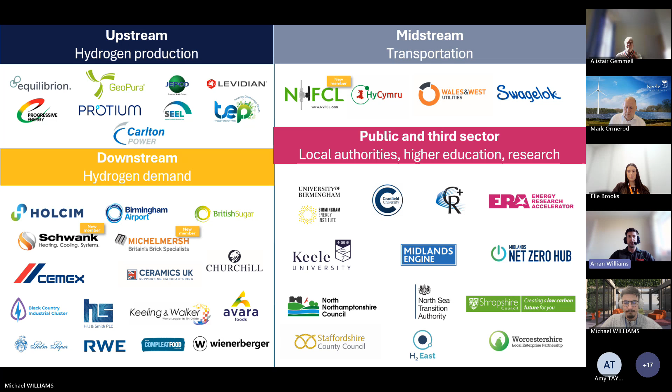Go to the next slide. Just a really high-level recap on hydrogen development since the last meeting. Quite a short one compared to previous consortium updates. I normally would have several slides on what's been happening, but for those of you keeping track, it has been quite slow.

We're waiting on the hydrogen strategy refresh to come through, and with that, we're expecting the next round of real tangible updates. We'd hope to see an update on the final projects for HAR2, and further details about the HAR3 round allocation process.

Sorry, my mic is disconnected. Can you hear me? Yeah, we can hear you, brilliant.

Sorry about that. Also, on the hydrogen transport business model, we're expecting that first allocation round to open in spring, but we still need real clarity on exact timelines and the details surrounding it, although conversations have been ongoing with DESNZ in the background.

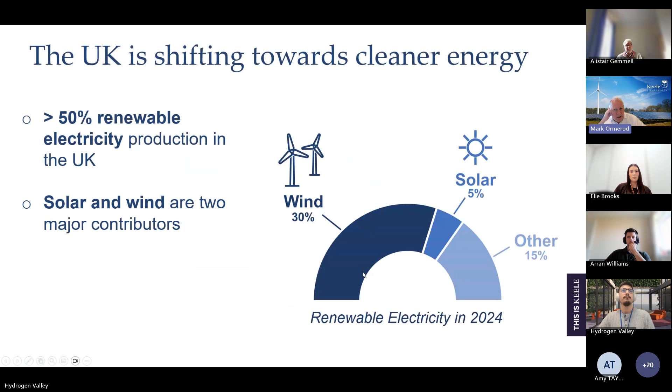No problem. I think the next few slides I can skip through quickly because everyone on this call... we recently gave a presentation to the whole university, and they were probably not as well versed in hydrogen and clean energy. So Michael, if you skip through this slide, the one after this, and the one after that, then go on to the next one.

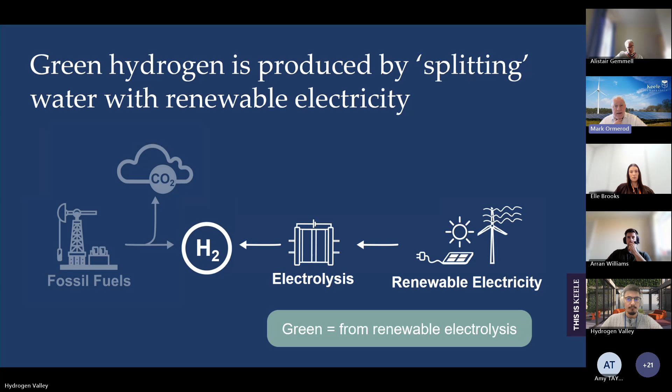Very much the ultimate aim was to be able to demonstrate around green hydrogen. Again, I think everyone here knows what green hydrogen is - producing hydrogen from renewably generated electricity. In our case, it then goes through the smart energy network demonstrator to an electrolyzer we have on campus, and then the ability to electrolyze water to produce green hydrogen. Okay, next slide, please.

So it was a project funded by Research England, with some demonstration of elements at a number of universities, but led by Keele with 5 million pounds of external funding from Research England, very much around demonstration, development, and also a significant amount - I'm not going to talk about the skills part of it, but a lot of skills sessions and development sessions and general knowledge exchange. Okay, next slide.

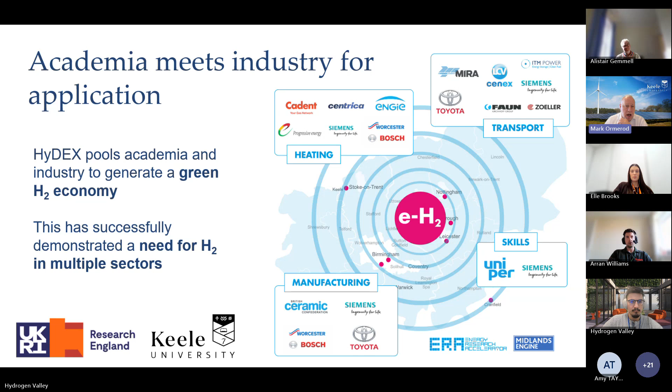So a significant number of industrial partners on the project, covering different areas - skills, manufacturing, transport, and heating. There's 7 or 8 university partners, and generally a project that's worked very well in terms of engagement. I wasn't heavily involved in that side of it, but the reports and events I went to were really excellent around engagement with regional and national industry in this area. Okay, next slide.

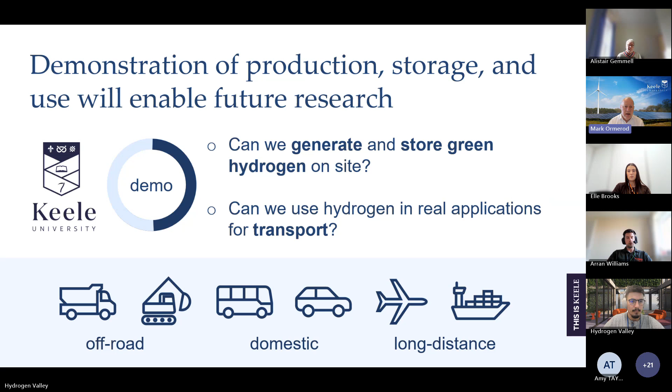And so I'm going to focus on the final few slides on the work we've done at Keele. It's quite a long journey - we've been on this journey for some time around being able to demonstrate hydrogen production, storage, and use, and not only being a demonstrator, but a research facility. The first thing was to actually generate and store green hydrogen on site, and then subsequently to use that in real applications. Everyone here will be aware of potential applications for hydrogen around transportation, whether domestic use, long distance use like shipping and flights, or off-road use such as what JCB is developing. Okay, next slide.

The reason we managed to get this project and run it from Keele is that we have our own campus renewable energy, low carbon energy generation park on campus, which has 12,500 solar panels, 2 large wind turbines, and a large industrial battery. That links to our smart energy network demonstrator, which uses our private network on the university campus, which is like a small town: 12,000 students, 2,000 staff, 350 mixed-use buildings, and a large integrated science and innovation park. Because of the way the university works and the potential to generate green hydrogen at Keele, we were able to leverage the funding to extend the smart energy network demonstrator to an electrolyzer and start producing green hydrogen.

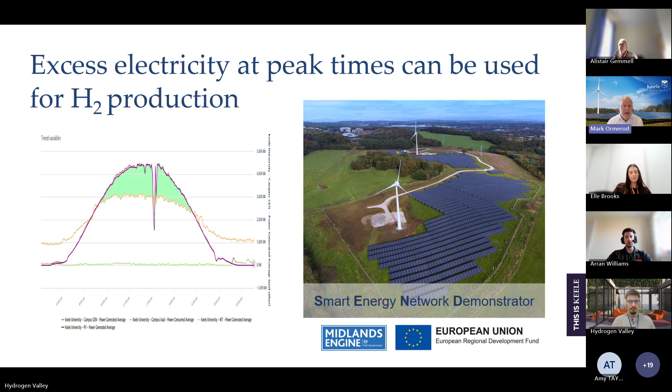On the campus we've installed an electrolyzer. It's a fuel cell systems electrolyzer, an anion exchange membrane electrolyzer.

We can produce, not huge quantities of hydrogen, but through its modular construction, we can produce 10 kilograms of hydrogen per day.

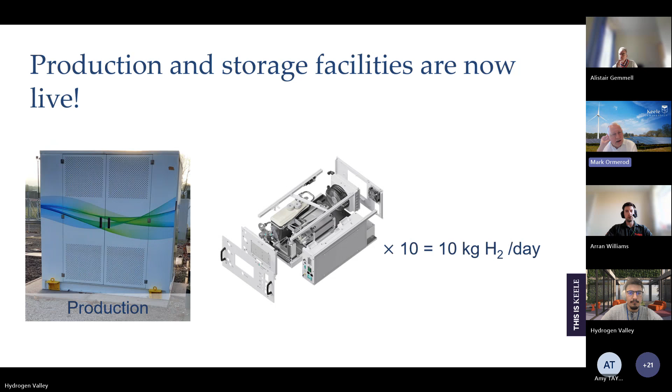We can store up to 100 kilograms of hydrogen. So we've got production through the electrolyzer, storage ability, and then the refueling ability. The site now looks rather nice, I just haven't updated the photograph.

We formally launched it in early January. We had Baroness Berger from the House of Lords, the former Shadow Minister around energy and climate change, come to open it along with quite a lot of external people. The site looks better now, but these photos were taken at an earlier stage. So we've got production, storage, and refueling.

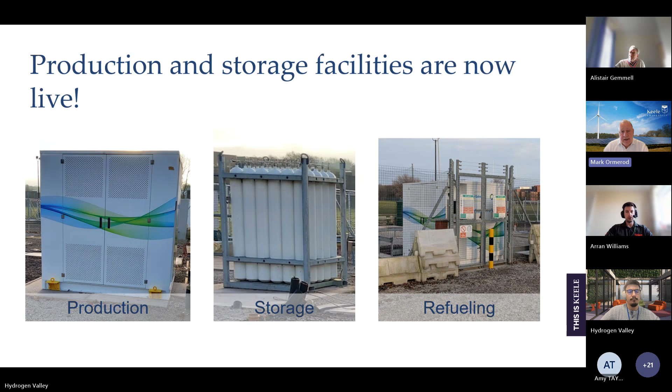One of the things we've been working on at Keele for a long time is using the campus and our private network and our commitment to sustainability and low carbon energy so that we can use the campus as a living laboratory, in this case for the production, storage and use of green hydrogen. We've got 2 hydrogen cars from Toyota that we've now branded up, so there's a full demonstration across the whole chain, from renewable energy generation through to green hydrogen generation, to fuel the cars we use for particularly local journeys, demonstrating the power of green hydrogen made at Keele powering this car.

We're really now developing this as a platform for more detailed research around smart energy and hydrogen usage. We've just submitted a paper around the potential and feasibility for using it in green transport options, including ultimately buses from Newcastle up to Keele.

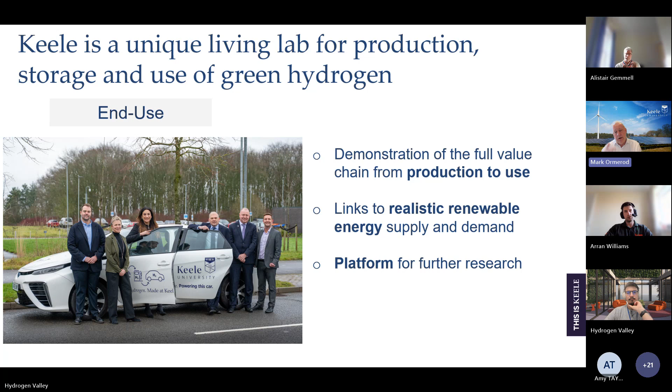The whole project, the HyDEX project, has now finished in terms of funding, although we're still actively doing research and have secured other funding streams. We did win the UK Knowledge Exchange Award for the best place-based knowledge exchange initiative for the HyDEX project, for the whole concept of producing, storing and using green hydrogen, as well as the wider skills and knowledge exchange around the project.

I think I've got one or two slides left. This is very much where we've got to, that we are trying to generate a...

Real hydrogen research centre around smart energy, hydrogen, renewable energy generation, and energy storage, as well as around advanced technology and materials. Developing a centre around this and using hydrogen to produce sustainable fuels, or ammonia for certain things. We've got smaller scale research, as well as these large demonstrator facilities taking place in research laboratories on campus. So really an exciting new centre for Keele around advanced materials engineering, that hydrogen is part of, but there's obviously a lot of other elements to that.

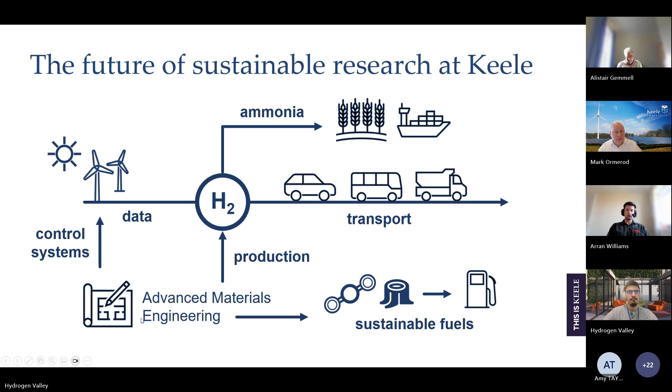Okay, next slide. Where we're looking now is very much around building doctoral training around this, summer schools, working with industry, and generating, really contributing. We've just become a member of the European Hydrogen Academy. It's very much around hydrogen technologies in industry, or hydrogen education around hydrogen technologies, which is a really good project.

We just launched engineering at Keele as an undergraduate discipline, which itself is very exciting. We've got the demonstrator at Keele, the Green Hydrogen Generation Hub, or GH2, and then starting to really say - I just mentioned one of those networks, the HyDEX Hydrogen Academy, which is an educational hydrogen technologies network.

And then final slide. So there's been a lot of people involved in this. It was a big capital project for the university. Some of the colleagues on there are colleagues in estates and engineering, building management systems, and so on, as well as colleagues in the School of Chemical and Physical Sciences like Charlie, Peter Matthews, Raphael Hershey.

Really a multi cross-institutional project across the academic staff and professional services, particularly people in estates, but indeed in procurement as well. And then ERA, the Energy Research Accelerator, which is part of Midlands Innovation, a partnership with other universities, where there's been other demonstrator projects or other key bits of the HyDEX project.

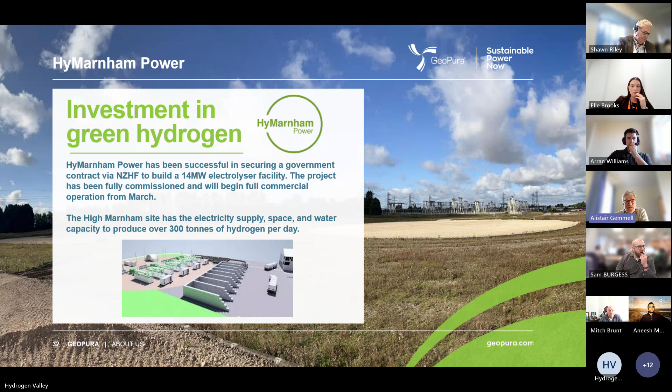Next slide. So a little bit of background and where we've got to with the project. GeoPura, first of all, and I'll explain about this a little bit more in a moment, already had a 1 megawatt production facility at a place in Doncaster. So that was producing a couple of thousand kilograms a week.

We are in a business where we are the user of hydrogen. That's our prime business, and I'll explain what that is a few slides on. But basically, other people were not building plants as fast as we had anticipated in our business model, so a lack of offtake opportunities meant that our business model was being constrained. We couldn't deliver as many of our own products as we wanted to, and therefore we decided to make our own green hydrogen to a greater extent than would otherwise have been possible. And therefore we made the decision to develop HyMarnham.

HyMarnham, with an HY, is a bit of a play on the place name, which is actually High Marnham - a place near Newark in Nottinghamshire, as we'll see in a moment. Our 50-50 joint venture partner is JG Pears, there to support us with scale-up plans.

So what does it comprise of? We bought 15 electrolyzers from a company called Green Hydrogen Systems. That delivers a 14 megawatt capacity and about 32,500 kilos a week of production. We've got HAR1 funding, which is going to be worth about 200 million over a 15-year period of the contract.

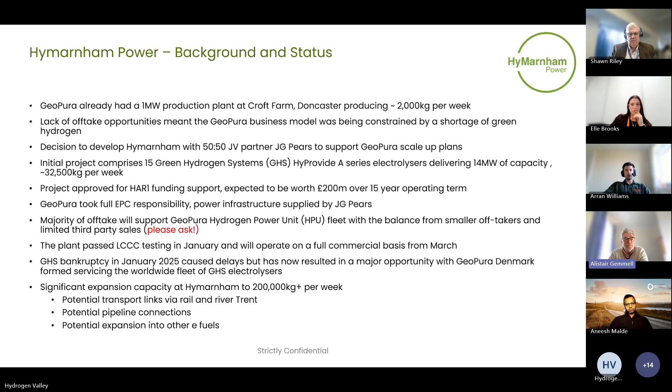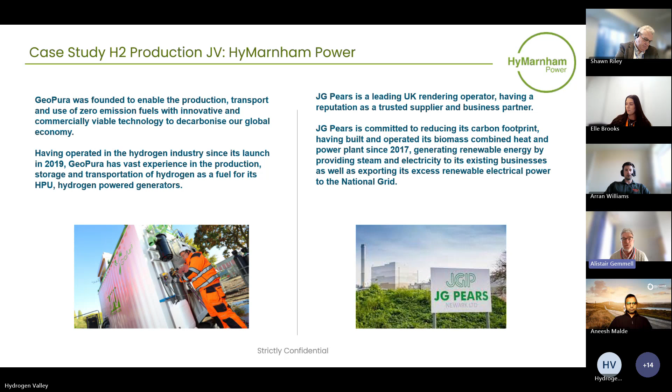In years gone by, you would go out to the market and either buy or rent a diesel generator to support your activities. We're proposing that you buy or rent a hydrogen power unit instead, getting the same power generation but with zero emissions - not only no carbon, but also no NOx, no particulates, and no noise, because it's a silent process. In order to facilitate that, we've got involved in hydrogen production ourselves. In the ideal world, we would leave this to other people and simply be an off-taker of other people's plants.

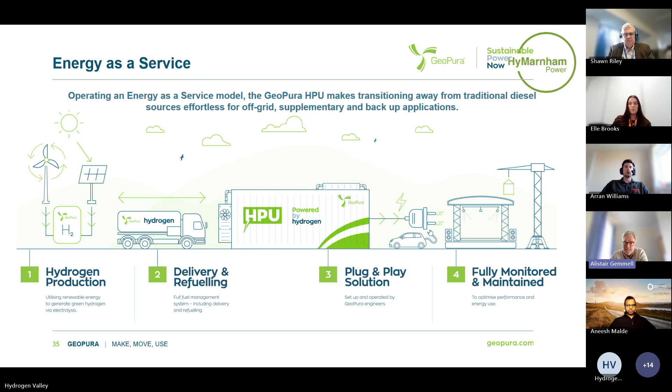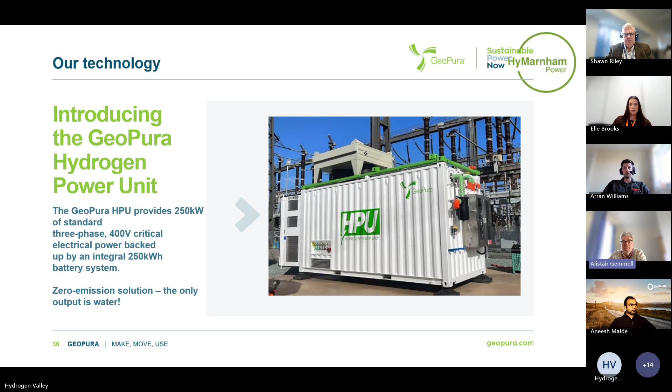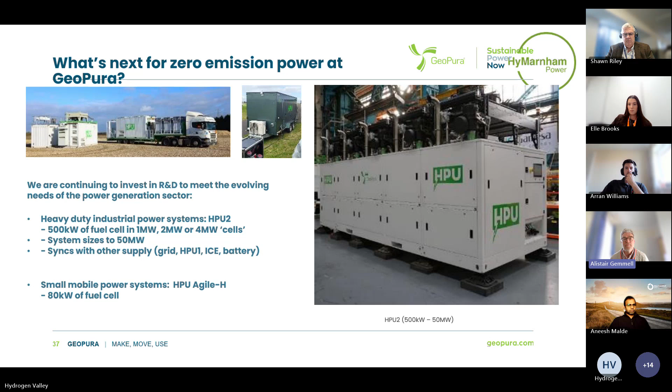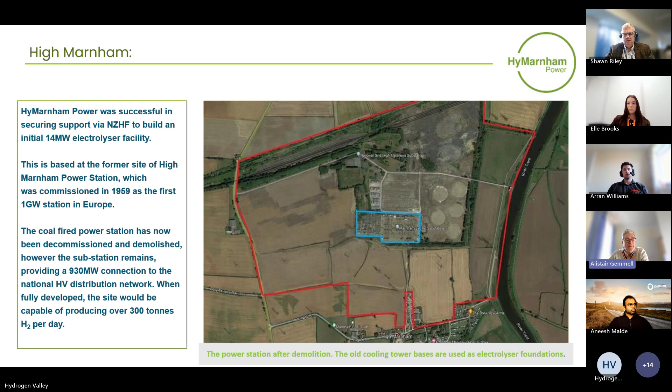To get back to HyMarnham, as I say, High Marnham is a place. It was a coal-fired power station, opened in 1959 — the first gigawatt coal-fired power station in Europe. The land owned by HyMarnham Power Limited is within the red boundary that you see there, and the only part we can't touch is the part in blue, which is the high voltage substation, which has got a gigawatt connection.

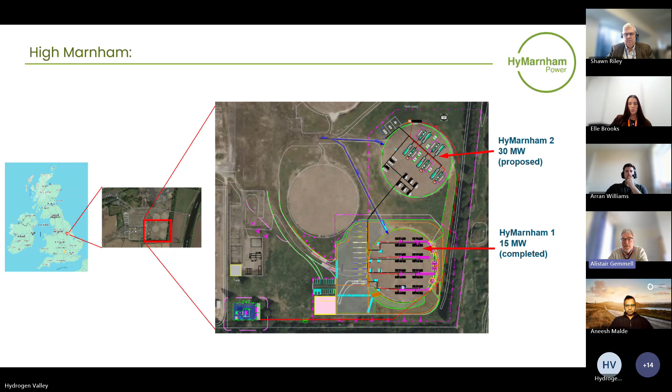This is just to show you on the map of England where it is — near Newark in Nottinghamshire. The next picture shows an aerial view of the former site of the 5 cooling towers, which are no longer there. The image on the right shows, at the bottom, what we've built: this plant I'm talking about today, 15 megawatt capacity, HyMarnham #1, built on one of the cooling towers. Above that is HyMarnham 2, which is just a proposal — we're not currently contracted to do that, but it gives an illustration of where we would scale up.

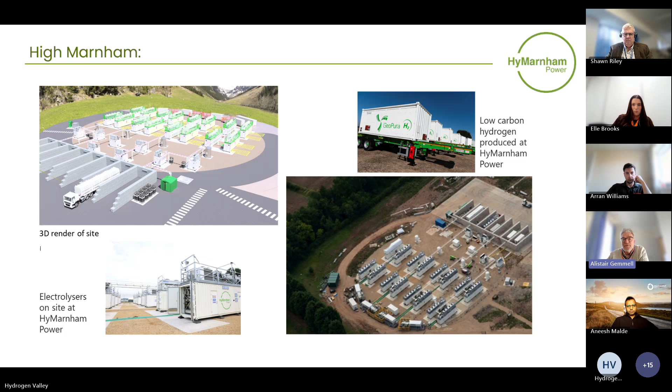That's one of the 40-foot containers there, yeah. Next slide.

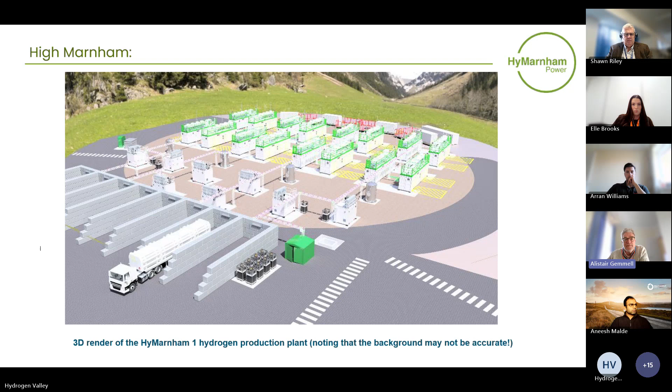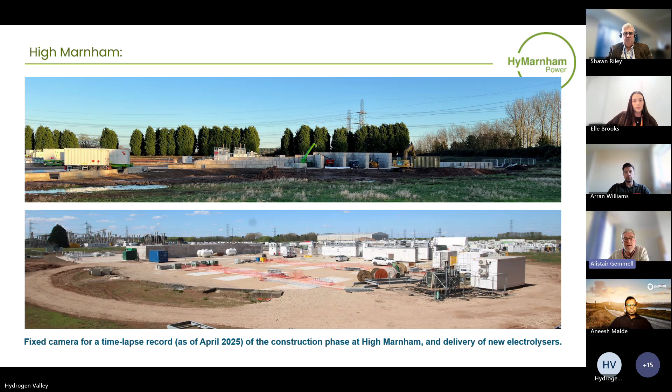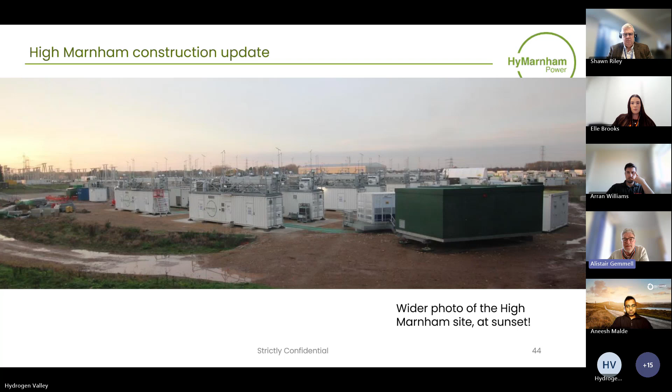Next slide. These are the refueling bays, each filled with a tube trailer, just to illustrate the 8 refilling bays and what they would look like if the tube trailers were all being filled simultaneously. Next slide.

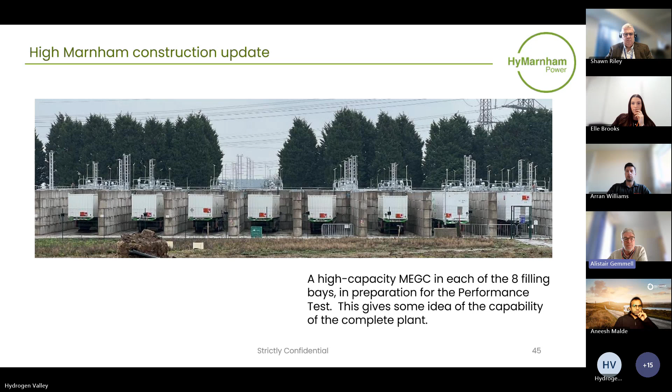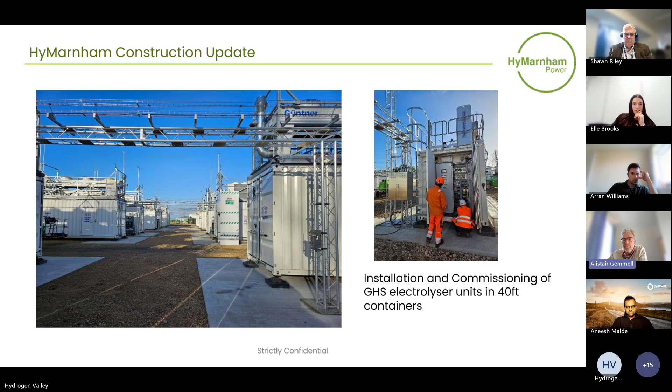This is just a shot of people commissioning the units, the electrolyzers, and it gives you an idea of the hydrogen infrastructure that's between them. So the gas is passing on that pipework that's up quite high, and anything electrical is down in the ground. Next slide.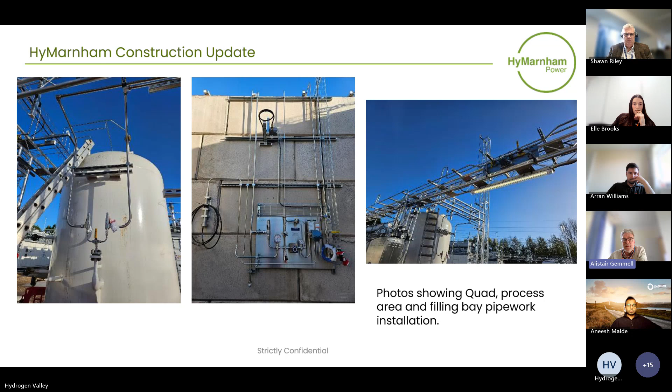And again, another couple of construction site photos. This is the safety system and the control system in the green hut. Next slide.

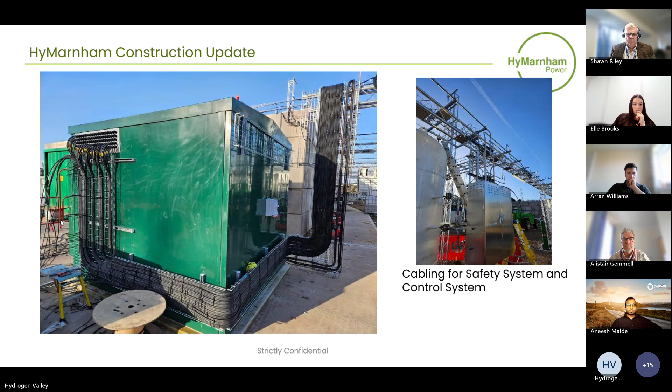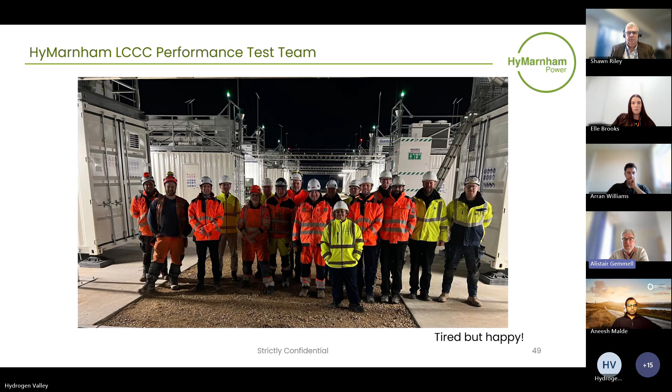And there is the team assembled in January, passing the final LCCC performance tests - tired but happy, as it says. An enormous effort by them all the way through December and January to finally get the project signed off. And the last slide, I think.

So, how have we done it? To go back through our story a little bit - GeoPura's whole business model is to do hydrogen power units, and therefore to buy other people's green hydrogen. Other people weren't making green hydrogen, so we had to make our own. That made us really pivot our business model, which is why we had to do the convertible loan note.

We did a Series A financing for 36 million. We did a convertible loan note to ask our shareholders fundamentally to back the building of the plant, which they very kindly did. It is HAR1 supported, which gives us a small grant that goes towards the building of the plant. So that was great.

And at the bottom there, in September 25 we have a buyer's credit facility supporting the site, which comes from EIFO - or the guarantee for which comes from EIFO, the Danish ECA - and the actual finance itself was provided by Barclays. So it is a fully project-financed plant, and it's the first HAR1 plant to be built. In fact, I'm not really aware of any other HAR1 plant that has even put a spade in the ground, but we have done it, and we are finished and producing hydrogen at full capacity right now.

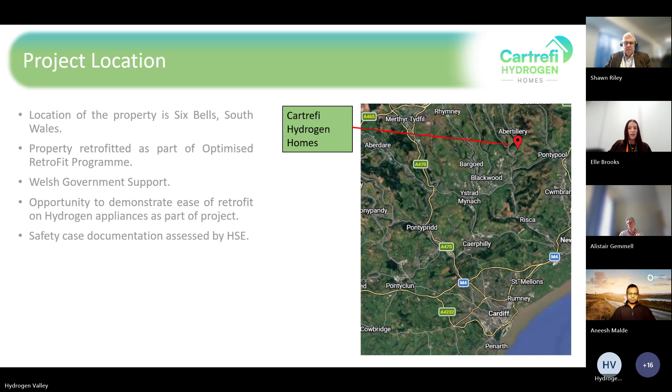So I'll now take you through the key stages of commissioning, a very shortened version of this because I didn't want to bore everybody to death. But this is the part of the project where safety, process validation, and engineering discipline mattered the most to us.

So as I've mentioned a million times, the property was retrofitted in line with that ORP funding. This meant it had fabric improvements in order to ensure efficiency and enable a fair comparison between hydrogen heating and other low carbon systems. For example, the property had external insulation, new roof ventilation, new roof tiles, doors, windows, that kind of thing. Then we had additional funding to put the hydrogen appliances into the property.

We then have the infrastructure installation, so a hydrogen above ground installation, or at Wales and West, we're known for having lots of abbreviations, HAGI for short. The HAGI was installed, and this is similar to a gas governor used on the distribution network today. The HAGI for this project is only required for demonstration purposes, it's not a requirement for future rollouts. This is something we're trying to tell residents nearby, you're not going to have one of these structures in your garden, it's just for demonstration purposes.

We then had the hydrogen delivered to site in August 2025, and we get this from a green hydrogen supplier in Baglan in South Wales. They deliver it directly to us in the form of multi-cylinder pallets, like you can see in the photos there, the red bottles.

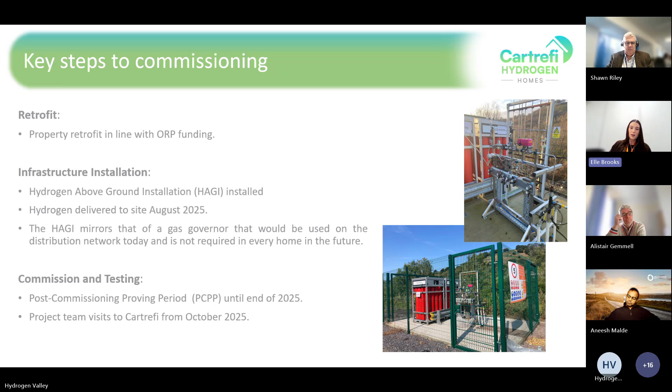So, governance and sign-off process. As I already mentioned a few slides back, a bespoke HSE safety case was developed specifically for this hydrogen demonstrator. The HSE was heavily involved throughout the build process, and this was something we decided - we reached out to the HSE wanting them to be involved in the project. The HSE review then concluded in April 2025, confirming the robustness of the approach, and then Wales and West Utilities signed the site off as an operational gas asset in the summer of 2025.

The project has also driven the development of new standards and procedures, which you can see in the bottom left - those six repeated photos are different policies and procedures that we've got for the project. We hope that these standards and procedures will help to inform future hydrogen trials and potentially policy decisions as well.

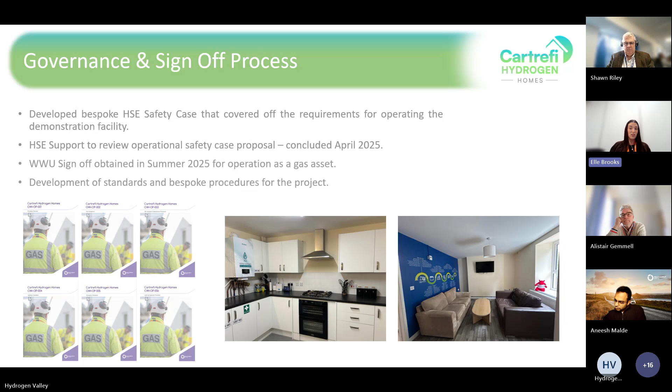Next slide, please. Thank you.

So, site safety. The site features a newly installed hydrogen supply, which you can see from the photos a few slides back. We've also got hydrogen sensors placed throughout the home. The hydrogen we have is not odorized, so we've got a sensor in every single room, essentially acting as if it were our nose, if there was ever a gas leak.

All visits are controlled by a dedicated competent individual, which is myself. Being the site manager, my job is basically to facilitate bookings to the hydrogen home and also do the tours. We also have 24-hour site security as well as daily property and equipment checks. But again, although we conduct these daily checks and 24-hour monitoring, this is only for the demonstration - it's obviously not a requirement for real homes.

And then, training and competence. Wales and West engineers have been formally trained to work with hydrogen, understanding the differences between working with natural gas and hydrogen. I've also got a dedicated engineer that supports with daily checks as well as purge and relight operations.

We also have hydrogen equipment used to support the project, similar to that used to detect natural gas today - in the form of a Gascoseeker, which detects gas leaks. Our daily checks involve going from the HAGI all the way to the house, making sure the system isn't leaking. Like I mentioned, it's similar to what gas engineers use today, and we think this is really important to help with future industry adoption - everything we're using on the project is what the engineers are already used to, it's not new equipment they have to learn.

A bit about comms then. Approximately 200 visitors have toured the home so far. These are a mix of internal project team, engineers, local authorities, as well as external stakeholders. The key feedback themes we've seen so far are that confidence increases when people see hydrogen operating safely, and visitors value the transparency around the safety, commissioning and controls of the home. We also believe many leave with a much clearer understanding of hydrogen's role in potential future decarbonisation.